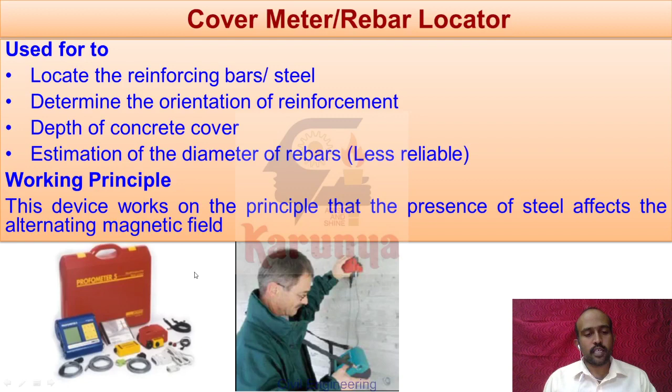So working principle, on what basis is this rebar locator working? This device works on the principle that the presence of steel affects the alternating magnetic field. So eddy current principle. In this picture, he holds this instrument and one device is moving along the surface of the concrete. If reinforcement is encountered, that alters the magnetic field. This device senses that alternating magnetic field and locates the rebar.

What is the importance of cover meter or rebar locator? On-site testing of reinforced structures. Any on-site testing needs the reinforcement location. That time it is useful. For example, half cell potential meter needs exposure of reinforcement. That time this rebar locator helps to determine the exact location of reinforcement.

Drilling and core cutting. In core cutting examinations, we should not disturb the reinforcement. We should not cut the transverse or longitudinal reinforcement. In order to determine the location of transverse or longitudinal reinforcement, this rebar locator helps.

Conformity check of new buildings. For example, if there are any disputes between client and contractor regarding the confirmation of location of reinforcement, that time reinforcement location can be confirmed using rebar locator.

Investigations on unknown structures. Making drawings for old buildings for maintenance purposes. For an unknown structure, suppose the drawings may not be available, that time the structure strength can be examined and calculated using rebar locator. Number of rods present in the structure, diameter of the rod, if everything is determined, then approximately the present structure's strength can be determined.

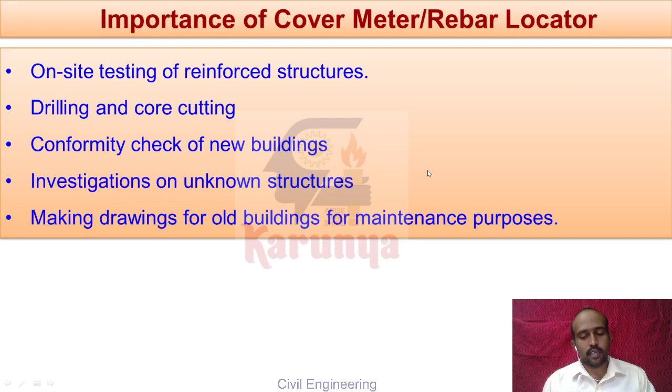This device has some limitations. Let us see the limitations of profometer or cover meter. Accuracy of rebar locator for bar diameter measurement is very less, hence not recommended to predict the bar diameter. If the bars are closely spaced, less than 40 to 50 mm, in case of beams, the bars may not be differentiated.

Similarly, if the bars are in layers with spacing 40 to 50 mm, in case of beams, the bars may not be differentiated. For example, in any congested areas, any close location of bars, it cannot measure the bars accurately. If the bars are located layer by layer, it also cannot properly predict the bar diameter and number of bars as well as bar location.

In general, bars can be detected up to 70 to 100 mm deep. If cover depth is more than 100 mm, the accuracy of locating rebar is very less. Beyond this depth, only higher diameter, 25 mm, may be detected up to 150 mm cover. So if the cover is more than 150 mm, the device cannot locate the reinforcement. It should be noted that the accuracy of cover meter test devices reduces as the concrete cover increases. If concrete cover increases, the accuracy of location of reinforcement is very less.

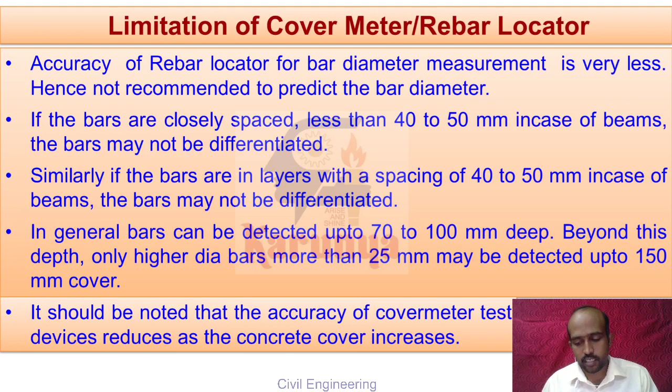Next one is half cell potential meter. This device is used to understand the probability of corrosion in a structure. As with rebound hammer and ultrasonic pulse velocity test, we have to make a grid of the entire structure and do the analysis of the entire structure. Then we can understand which portion is highly susceptible to corrosion. For that purpose, this half cell potential meter is used.

So how is the half cell potential meter working? Before knowing the working principle of half cell potential meter, we must know some basics of concrete corrosion, how the concrete reinforcement is corroded. In reinforced concrete structure, there is a natural protective film that forms on the surface and prevents the bar from corroding, which point we already discussed while discussing the carbonation test.

Due to the high alkalinity of concrete, the pH value is around 13.5. That forms a protective layer or passivating layer around the reinforcement. If the passivating layer is there, there is no possibility of corrosion. But due to the action of chloride and carbon dioxide, this passivating layer breaks down. If the passivating layer breaks down, the corrosion reaction takes place, and finally the reinforcement bar present in the RC structure gets corroded.

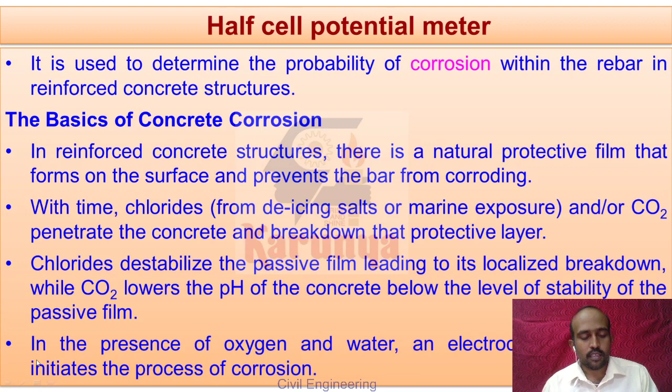The first reason is chloride and carbon dioxide, that decreases the pH value and breaks the passivating layer, and in the presence of oxygen and water, the reaction takes place. Finally the reinforcement gets corroded.

So this process is illustrated in a pictorial representation. Take this typical picture. The gray color indicates the metal and yellow color indicates the electrolyte. Concrete and moisture act as an electrolyte. So here electron conduction takes place from cathode to anode, and ionic conduction takes place from anode to cathode. This current flow is happening. This current flow is measured by a half cell potential meter. So with this illustrative picture you can understand better.

So in the reinforcement, the first corroded region will act as anode, that supplies the electrons from anode to cathode. This cathode attracts the electrons. Suppose for example a ferrous atom is there; we know that the number of protons is equal to the number of electrons. So two positive charged ions and two negative charged electrons are there.

For example, it supplies two electrons, and in the presence of oxygen and water, these electrons react with the oxygen and water and convert into hydroxide ions, and these two positive charged ions react with the hydroxide ions, then form ferrous hydroxide Fe(OH)2. This reaction is called corrosion. So the corrosion process takes place here. However much Fe(OH)2 is forming, that much corrosion takes place.

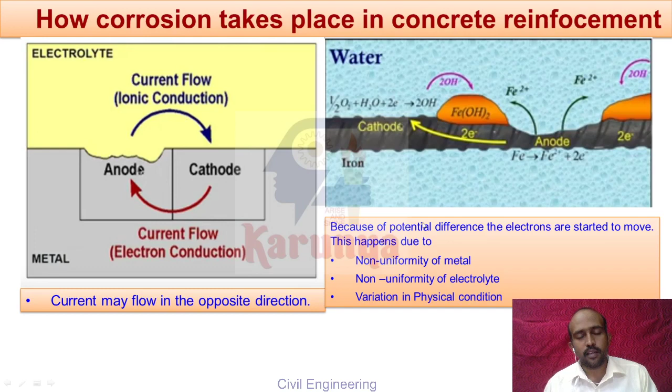One is due to non-uniformity of metal. Every metal has some amount of impurities. So the potential difference may happen due to non-uniformity of metal, non-uniformity of electrolyte, differences in the moisture condition present across the entire reinforcement, and variation in the physical condition of metal or concrete. So this is the very basics behind how the corrosion process takes place.

The voltmeter always measures the potential difference, as the electron moves from one place to another place through the concrete. This potential difference is measured using the half cell potential meter. If the electron movement is more, then the corrosion process is also more. Similarly, if potential difference is more, corrosion is also more. If potential difference is less, the possibility of corrosion is less. On that principle the half cell potential meter works.

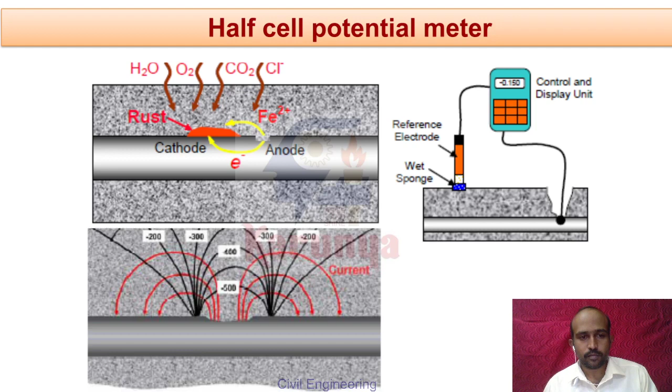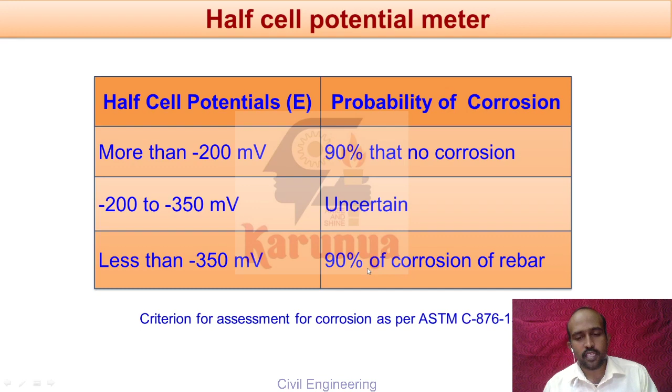So this table shows the values and the probability of corrosion. If the potential meter value is more than minus 200 millivolts, the possibility of corrosion is very low, 90% no corrosion. If it is minus 200 to minus 350, the corrosion is uncertain, may or may not occur. Less than negative 350 millivolts, the possibility of corrosion is high, 90%. The structure may be corroded.

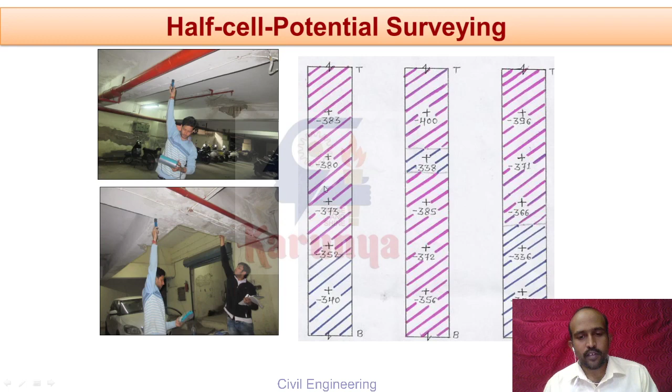So this graph shows the entire analysis of a particular beam. Finally we can plot the contour plots, then we can get which region is highly corroded and which region is less corroded. So this is a typical contour that shows the corroded regions.

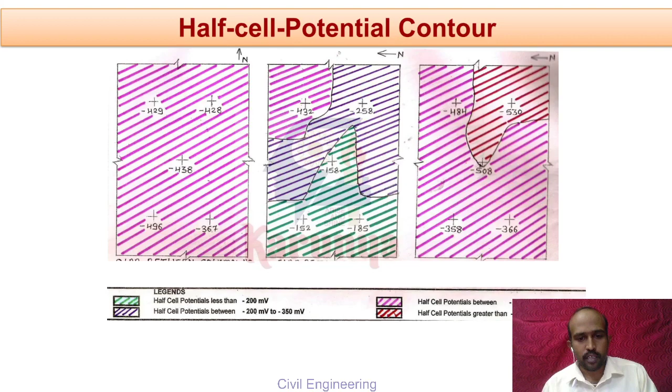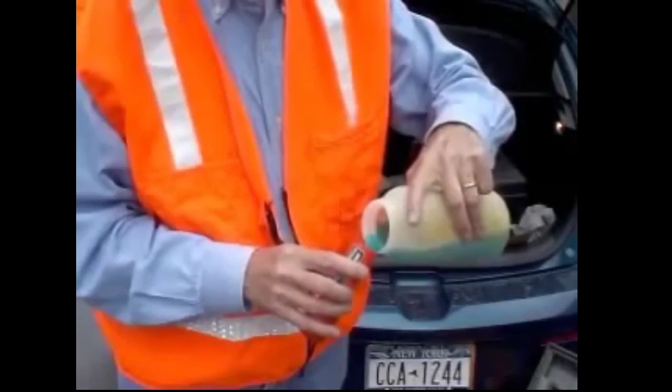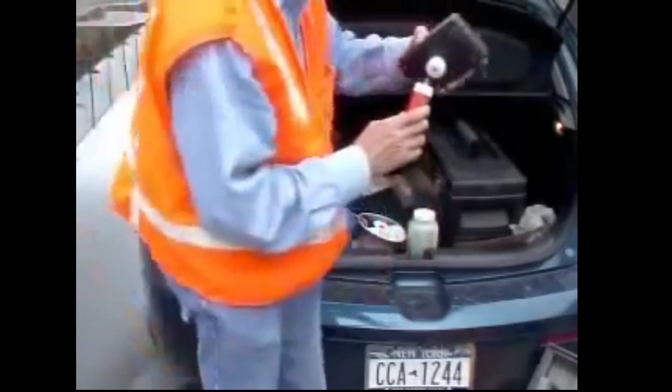This is a demonstration of ASTM C876, the standard test method for half-cell potentials of uncoated reinforcing steel in concrete. A copper sulfate solution is poured into the half-cell container. A 1/4 inch diameter copper rod is then immersed into the copper sulfate solution and the cell is sealed. The half cell is then screwed onto a voltmeter, and the protective cap is removed to expose the porous plug at the end of the half cell. The negative lead from the half cell is connected to the voltmeter, and a long positive lead is also connected.

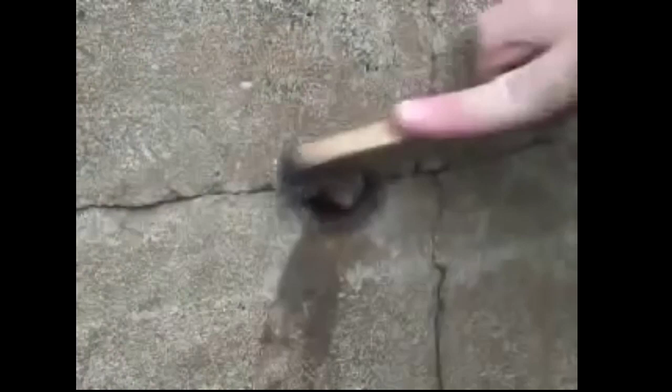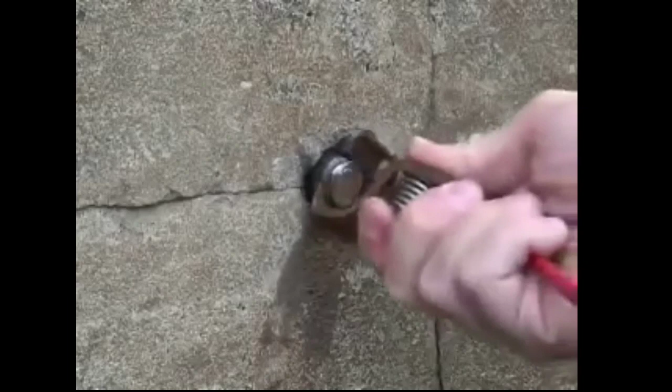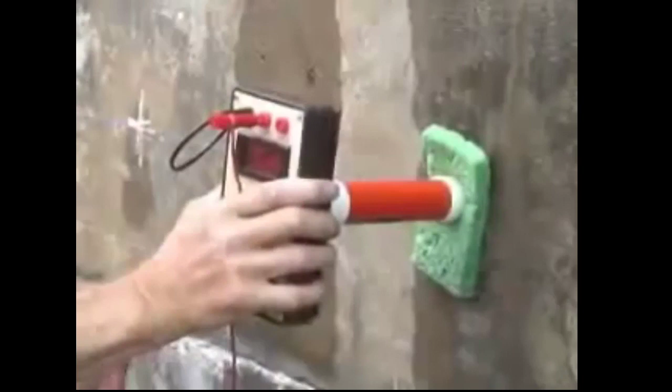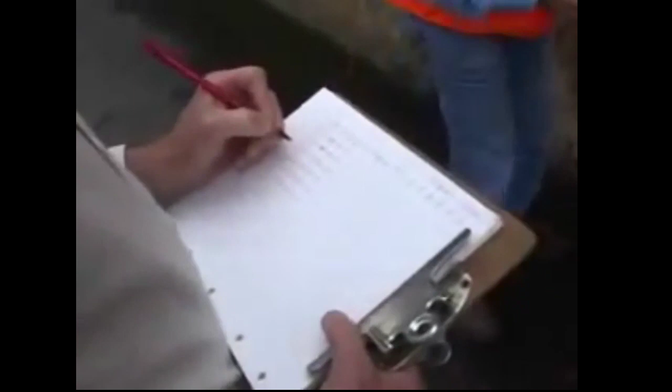Rust is first cleaned off of an exposed reinforcing bar protruding from the concrete area to be tested. The red positive lead from the voltmeter is then clamped onto the bar. Prior to measurements, a grid is laid out with 1 foot spacing spanning across the concrete surface to be tested. A wet sponge is placed between the porous plug of the half cell and the concrete wall to complete the circuit. Potential measurements are taken at each intersection along the grid. The measurements and their corresponding locations are recorded, and this data is used to generate a contour map of potential corrosive sites beneath the concrete surface.

Okay, in the next video we shall discuss measuring crack width, crack monitoring using camera and infrared thermography.